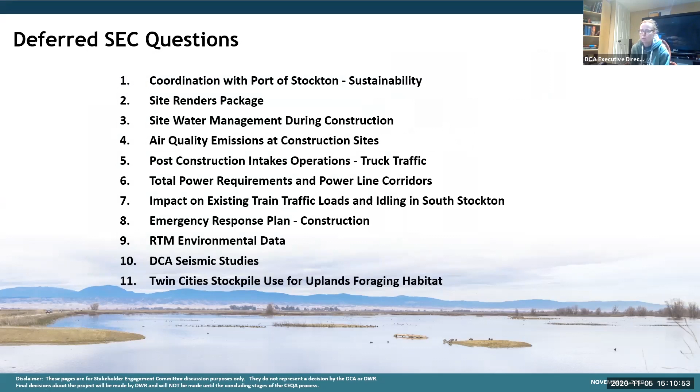Let's just keep moving. The first one was around coordination with Port of Stockton, particularly around sustainability. A request that we work together with the port, and that it's very important to help them improve their sustainability and help make them a clean port. And that any time community benefit opportunities may exist to help the port become a model of sustainable facilities, that we should consider that.

Next slide. So we did actually have a call with the port a few months ago as part of introducing them to the project, looking into opportunities of barging through the port. And in that meeting, we also brought up what they were doing around sustainability. There's 2 programs that they're running. The Delta Environmental Enhancement Program, where they largely partner with local organizations that do work in the Delta area, and that program is mostly focused on enhancing air quality, water quality, and habitats in the Delta surrounding areas. So I think that's a program where there may be opportunities to partner with them.

And then they're also a voluntary member of this Green Marine organization, and there's an environmental certification process that goes with that. The program helps industry share best practices nationally, and they grade themselves from a scale of 1 to 5 on 13 key areas of performance. Every year they release an annual report that demonstrates how they've been doing in those categories. I've read the reports the last 2 years, and there's lots of opportunity there for us to partner with them, because a lot of our goals around sustainability are very much in line with this certification program.

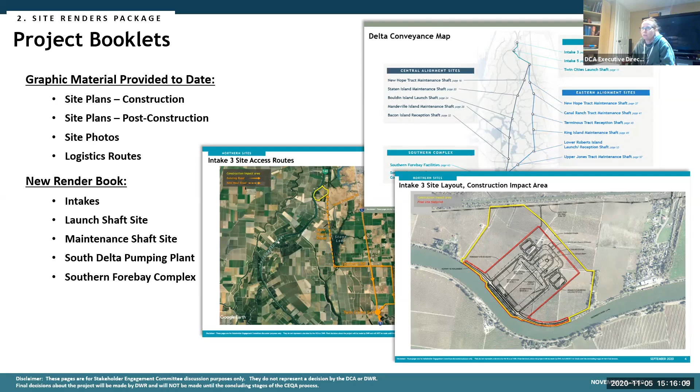So we've given you project booklets that have covered the site plans for construction and post-construction. Those are the yellow and red boundary maps that we've given you. We've included photos of the sites and logistics routes. And we've created another book for you all - a render book. We've created renders of each of the sites, or at least a typical site, so that you get an idea of what the leave behind is. We're going to show that to you next.

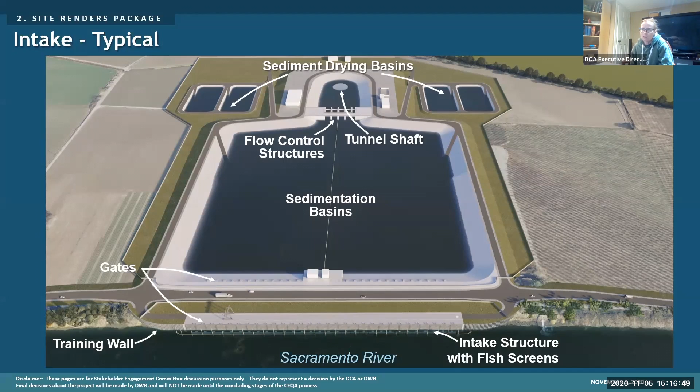So you've seen this one - this is the render of a typical intake. This happens to be the intake 5 site, but the intake design is similar at the intake 3 site. You have the Sacramento River with the intake structure and fish screens along the river, the sedimentation basins to remove the solids, the flow control structure that controls the flow going into the tunnel shaft, and that's the entry into the tunnel as the water heads south towards the southern complex. Then there's some drying beds as we remove solids from the sed basin - they need a place to dry out before they're hauled off site. So this is the intakes.

Next, this is a new render, a typical launch shaft site. This happens to be the Twin Cities launch shaft site. You'll see the dual shafts over to the left. If you recall, we're tunneling in 2 different directions there, one towards the intakes and the other south. So there's dual shafts there. And in the background there is the RTM stockpile. I show it in brown here so that you can get a better idea of the land requirements - that's about 100 acres, 20 feet high. If you recall, we talked about making that material available to various local beneficiaries of borrow material.

I think if you flip it, that turns green, Jasmine. Yeah, so we plan to put hydro seed on it. It won't be a dirt pile - it'll appear at least green when it's wet and rainy season, and it'll dry out like the rest of the grasses in the area.

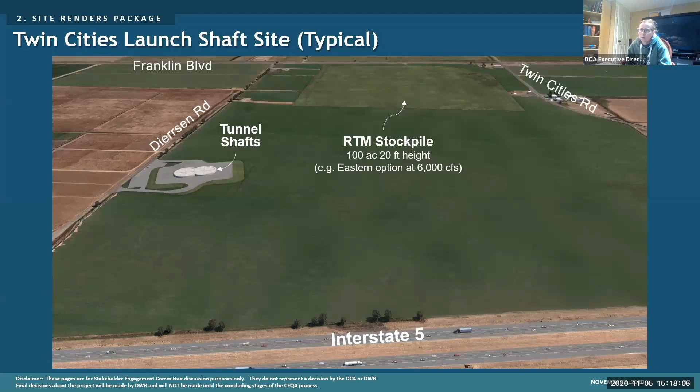But the rest of this site, as we talked about, would be returned to reclamation for agricultural use. And this would be a typical layout for the launch shaft sites.

Here's a typical reception shaft or maintenance shaft, a single shaft on the site with access roads coming off of the local roads, a maintenance and parking area, and a ramp heading up to a working platform right near the shaft. These sites are around 10 acres, typical of what the reception and maintenance shaft sites would look like at the end of construction.

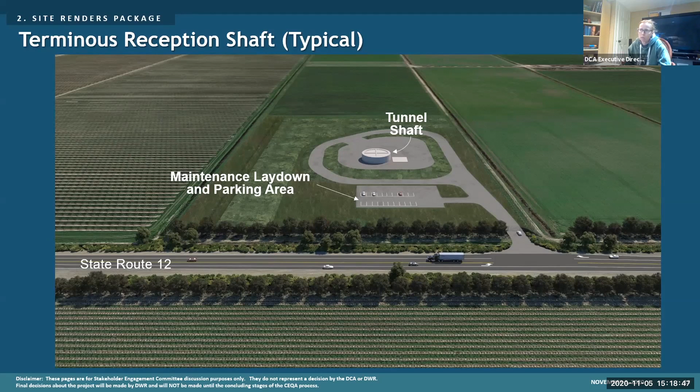And the last one, again showing the southern forebay, and there's a tunnel from the southern forebay down to the South Delta outlet and control structure, which connects the Delta conveyance water into the existing California aqueduct. Then there's the California aqueduct control structure built into the aqueduct so you can control the flow range from both of these water flow sources.

We've put these on 11 by 17 sheets, and we'll be printing and distributing those out to the committee so you have them as a communication tool for talking about what the final facilities will look like on each site. All of these you've seen before, except for the shaft site renders we've done.

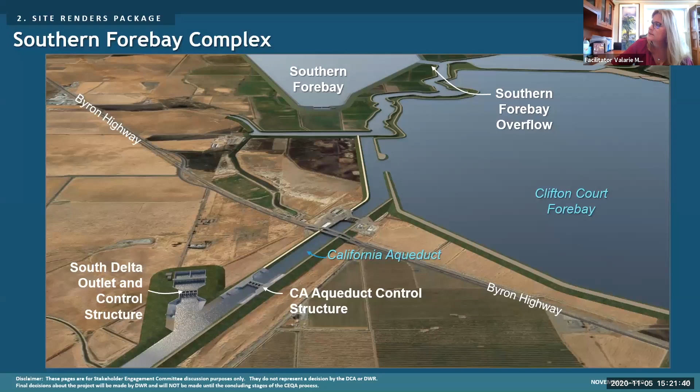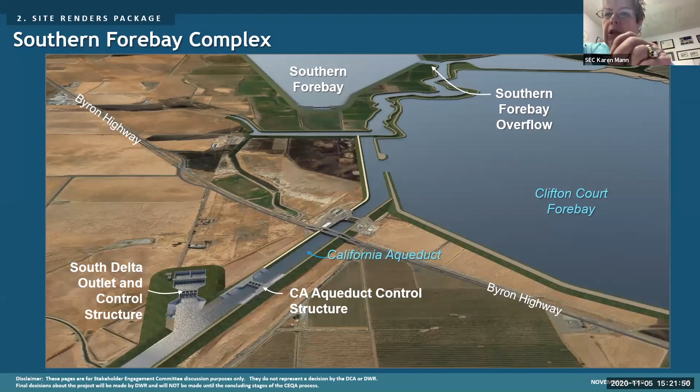Catherine, thank you very much for the explanation. Can we go back? I think it was two slides. I was wondering, yeah, right there, do you have an idea of how much distance you're looking at between Highway 4 to the north and this pumping plant? And I'm curious as to what properties are on the westerly side of the southern forebay. Do you have that information?

Hey Phil, can you unmute yourself? It's my recollection that it's about 1.5 miles from the pumping plant up to Highway 4, but that's just my recollection, you might know better. Well, to put it in perspective, from the pumping plant to the launch shaft is about 1 mile, so if you want to swing that around. So you're close, Catherine, I think it might be a little further.

Okay, about 1 mile. And to the left of that, could I find out a little more, because I know there are homes over there and I'm trying to figure out how close we are. Basically, that left side is those big WAPA and PG&E power corridors, and they're pretty wide, running all the way up along the left side. So any homes would be on the other side of those.

I think, Karen, most of the homes are a little further north than where we're at. No, there's some right in Byron. Well, yeah, those are quite a ways away. Okay, well that's all I'm looking at because that's part of my community down here. Okay, thank you very much. Welcome.

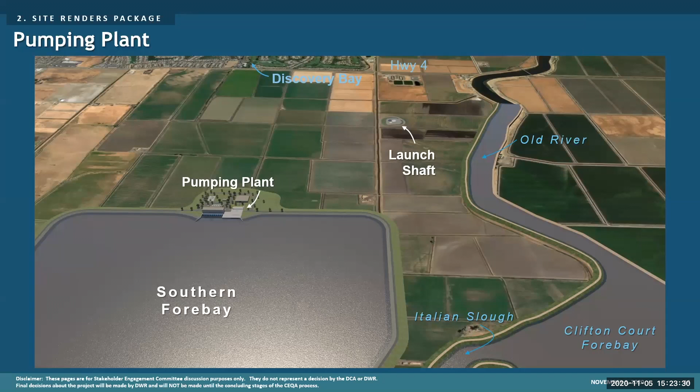Next. Did we get all the questions? Yes, we did. Oh, okay. Mel just put his hand up.

All right, Mel. Real quick, I'm assuming each of these sites will be secure sites with gates and fencing. Correct. Do you have any idea what type of fencing, how high it might be, as far as visual impact?

Gwen, I don't know if you got to that level of detail in the document, but I know we talked about 8-foot fencing around the properties. In some properties there would be more formal fencing, like around the pumping plant, with more security because people will be coming in and out all the time. The shafts post-construction will have fencing around them with gates. We also would not have any lights going toward adjacent properties, so lights wouldn't occur unless people had to do emergency work at night.

Just a follow-up comment - as a member of an agency that has facilities in the Delta, you'll have to pay particular attention to security issues, because the Delta is an interesting place at nighttime, and if you don't have a secure facility, significant damage can occur. Just a warning, and we recognize that, especially at places like the intakes and pumping plants.

And Barbara, you had a clarifying question. Just to pile on a little bit, because this now raises an issue we've never talked about - there's no sheriff on duty in the southern end of the Delta from 9 at night till 6 o'clock in the morning.

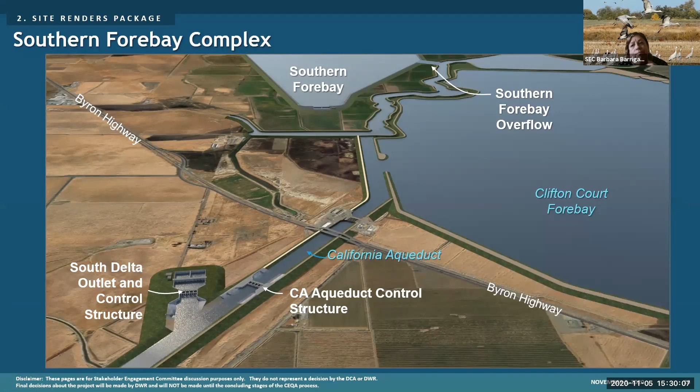So the whole security issue around equipment and even safety during the day, I think you've got a lot of work to do with the sheriff departments. Just so you know. Good luck. Thanks. All right.

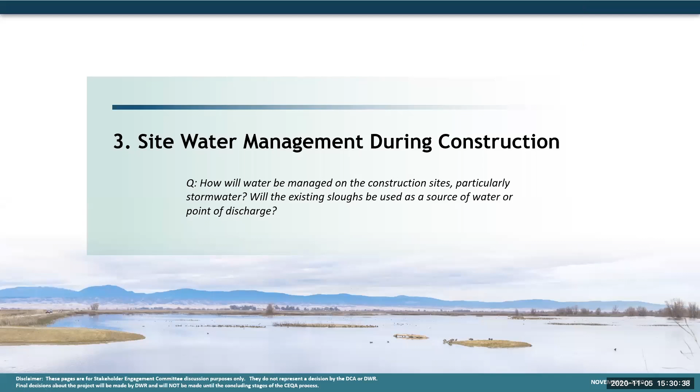One of the questions asked was how will we manage two parts of water quality: where do we find the water during construction and post-construction, and where and how do we manage the runoff and dewatering flows off of the construction site?

Our goal on all of this was to avoid reductions in surface water and groundwater supplies and water quality of the adjacent supplies. We want to maximize the use of on-site water supplies that occur due to construction, which will reduce the discharge of stormwater and minimize the need for other supplies. This means we limit surface water use to historical diversions, groundwater use to historical regional use, maximize the use of recycled wastewater if we need additional water off-site, and minimize the use of water from public water supplies.

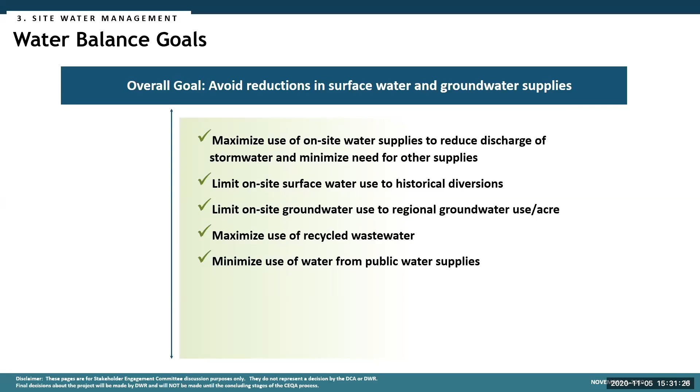Our major water demands on a construction site—we show 7 items here. Every site, though, has two biggest ones: construction site dust control at the top of the list, and tire wash basins at the bottom.

We're anticipating tire wash basins at each exit location for trucks and all other vehicles, including pickups and sedans. These tire wash basins recycle their water and filter out the soil material, but they do have makeup water going into them, and they're a large water demand on every one of our sites. If we have large sites like Southern Forebay, we'll have multiple exit locations, so we'll have tire wash basins at each one, because we're here to protect the adjacent roadways and minimize soil and dirt accumulation that would re-entrain and cause other dust problems.

Other major water demands at the launch sites especially is the water injected at the tunnel head to loosen up the soil—that occurs only at the tunnel launch site. We also need a lot of water to make concrete.

The potential water sources we would use are dewatering flows from excavations, but they only occur sporadically. We anticipate putting cutoff walls around sites like the intake site to protect the adjacent groundwater during dewatering activities, so we'll only be dewatering a certain amount of flows within shaft locations or the intake sites. But when it does come, we want to capture it, treat it, and reuse it.

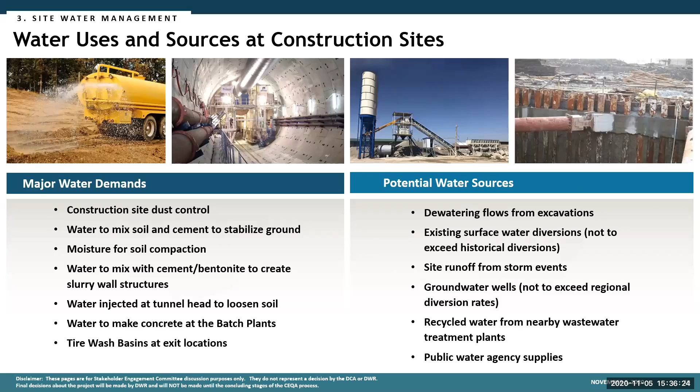Next, I wanted to give you an example and a relative feeling about how much, what the different water demands and water supplies look like.

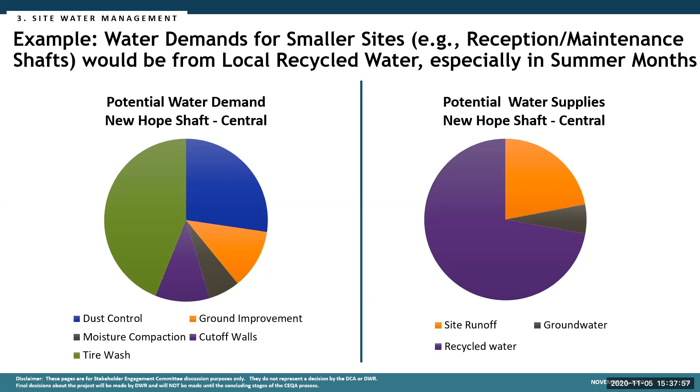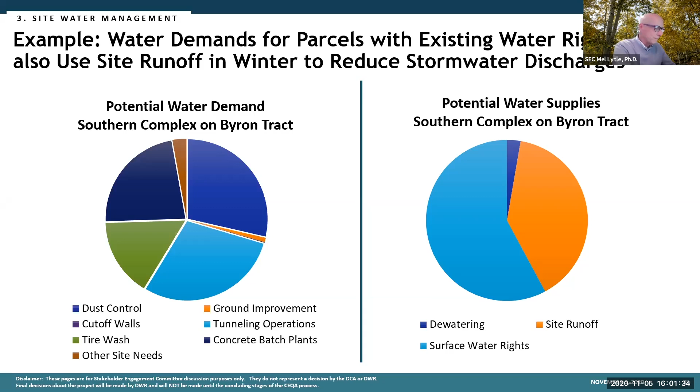Also, I mentioned the USGS publication. I have it: it's called the California GAMA Program, Groundwater Quality Data in the Northern San Joaquin Basin Study Unit, published in 2005. Thank you. Thanks, Mel. And Barbara Barrigan-Parrilla.

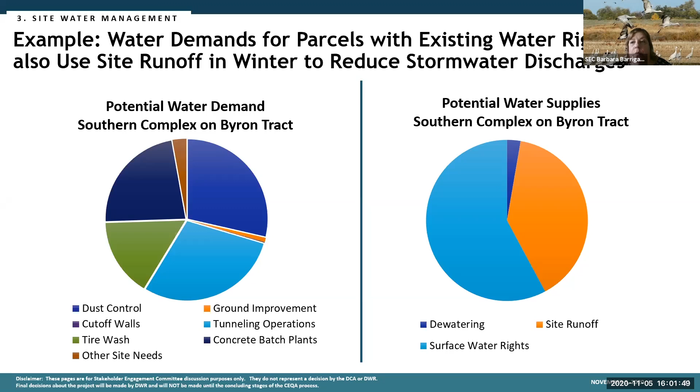Just real quick, I actually think Mike Moran covered it. Numbers when we can have them, because you don't know what you're tracking if you don't measure it. Thank you. Thanks. All right, it's 4:01.

Okay, air quality. We're asked to provide a little more information. This is a process in which we provide - next slide please - information to the environmental impact report team, and they do the analysis using the models established by the California Air Resources Board, US EPA, and others. We have pulled together and provide this information to the EIR team.

One of the things, and I know this has been talked about at other SECs, is we did a detailed analysis and schedule of all the different types of equipment that would be used at each one of the construction sites and the hours they would be used - electric equipment, non-electric equipment, and employees. We went through each type of equipment to determine and find specification sheets to confirm that if electric versions of this equipment would be used, we included that in the electric equipment.

In the non-electric equipment, or basically diesel, we also confirmed where commercially available Tier 4 diesel engines exist. We used the currently available information for two reasons. One is, on other projects I've worked on, we received comments that we were being too optimistic by saying electric equipment would definitely be available.

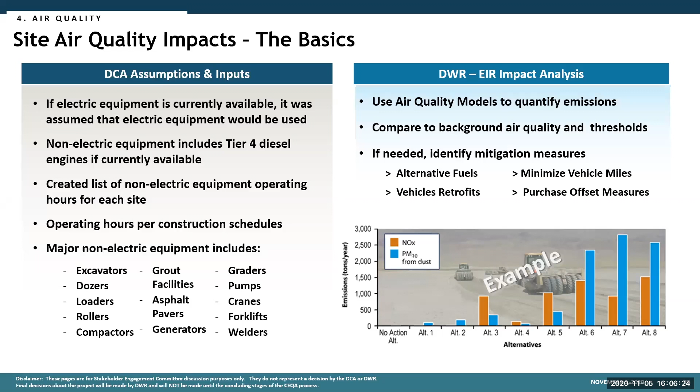For the 6,000 CFS option for Central and Eastern Corridor, this is just the total operating hours over the entire construction period at each of these sites. It really varies by month, so any one month won't look like this distribution, I guarantee you that.

But in total, it basically shows that most of the construction use, especially for non-electric earthwork equipment, is down at the Southern Complex on Byron Tract, because we're using them to form the embankments for the Southern Forebay, to move RTM around from the launch shafts, and to raise the tunnel shaft pads. There's also two batch plants down at the Southern Complex.

The next largest amount, go back one or two slides please real quickly, I'm trying to hurry. The intakes are the next largest group, because they have a lot of earthwork moving around in the highway, back and forth, and doing the sedimentation basin excavation.

And then the next are the two launch sites for each of the corridors, Twin Cities and Bouldin for Central, and Twin Cities and Lower Roberts for East. That is the completion of this. And again, this analysis will be done through the EIR, not through the DCA.

Got it. Okay, so we have a couple hands up, a couple quick clarifications on my part. Again, the project construction will follow statutory requirements, correct? Yes. Okay, and then CARB has issued directives, and the project will follow those directives as well, correct? They will be following part of the CARB regulations, and the modeling has to be done in accordance with them.

And just again, as you said, this is going to be handled in depth in the CEQA analysis in the environmental document. This right here is just a high level discussion and explanation of the modeling and not a definitive plan. You're just answering the question that was posed related to air quality during construction, correct?

Right, and it's not even the modeling. This actually becomes hours of non-electric equipment use, and it's used as an input to the models that the EIR team will be operating. And so with that, we have a couple hands up.

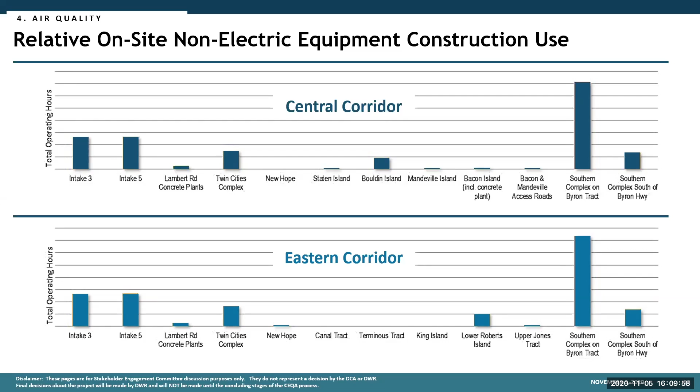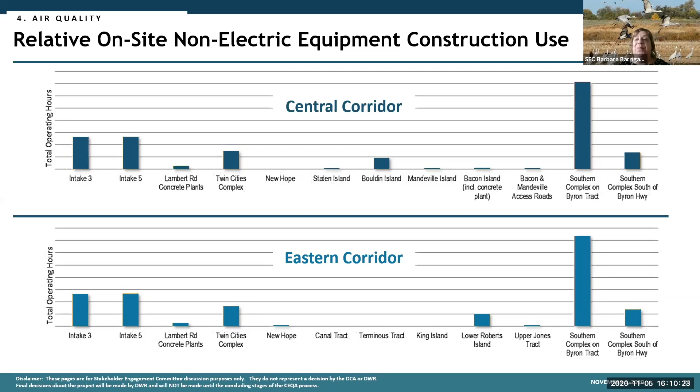And Barbara Barrigan-Parrilla asked: when it comes to offset purchases, can we advocate that purchases are made to benefit the impacted communities? We had a problem with the last EIR on water fix where offsets were going to be purchased for somewhere else in the world. So kind of an environmental justice principle.

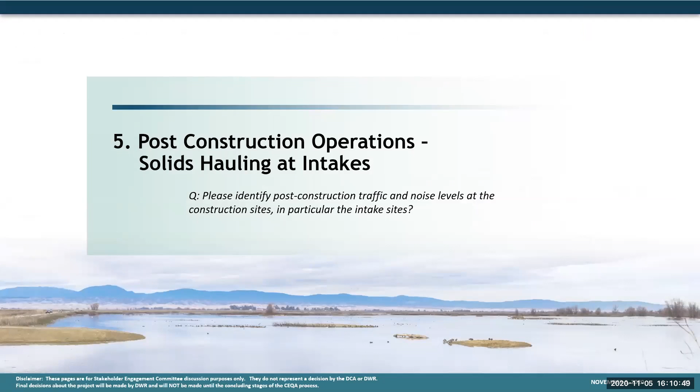Thanks, Gwen. Phil is going to pick up the next two questions dealing with the intakes and power corridors. So Phil. Okay, so the question was to identify noise and traffic levels at the construction sites, post-construction sites. Okay, so go ahead.

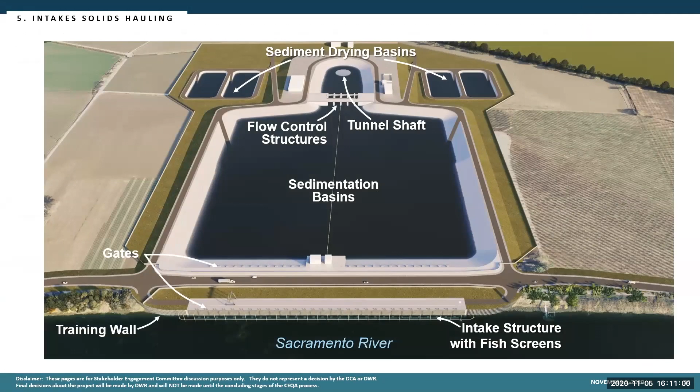The intakes themselves are gravity flow, so there's not a lot of motors or anything like that, so they just don't naturally make a lot of noise. It's the people working there that would potentially make any noise during operations. There's a certain amount of noise with some screen cleaning operations, but that's just typical crew work, nothing of consequence.

The biggest issue at the intakes is the annual removal of sediment. The sediment basins there collect the sediment, and then we dredge it out using a floating dredge and pump it into the sediment drying basins in a rotating pattern. The flow goes in as a slurry, you decant the water off, dry it out, and then scoop it out, rotating through that process.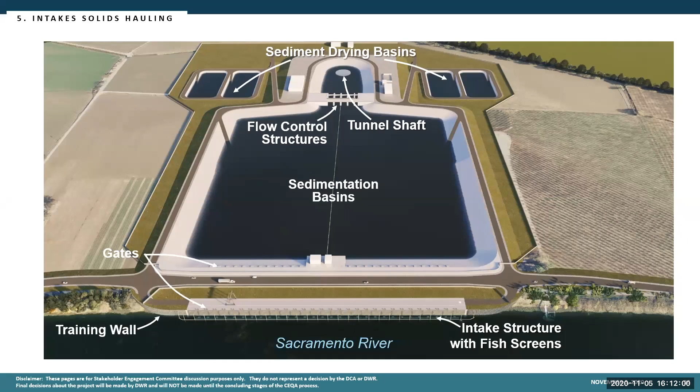So let's go to the next slide.

Each one of these basins is in a different part of the process to keep you continuously operating—scoop it out, then haul it away. The solids pumped from the basins would be dried once a year during the summer. It's essentially 2.5 to 5 months, 10 to 20 weeks a year to dry it and haul it off, and that depends on a lot of things associated with how much sediment is in the river and how much water we divert.

Obviously, if there's not a lot of sediment in the river and we don't divert a lot of water, you'd get a lot less sediment collected. But if the river was really full of sand and silt, and we diverted a lot of water, we'd get a lot more. So the upshot here is right now we don't have actual operating data to predict on a statistical basis how DWR would divert water through these things.

Okay. All right, no other questions? Nope. I think David Welch had a hand up.

I'm sorry, I can't find that wave button, but my question is - you're talking 2 to 10 trucks per hour. Yes. The conditions of our roads right now are horrible. Is there any plan for redoing the roads? Well, that traffic would be on dedicated haul roads. Yeah, and so they would come out either onto Lambert or to Hood Franklin. But again, the traffic analysis we've shown, both those are relatively low travel.

For a few trucks like this, we can do that traffic analysis, but it shouldn't be major. And then the noise level, the equipment you guys are going to be using will have backup alarms. I'm telling you, because we have a water purification plant going in here in the town of Hood, and the county has not been able to work until 8 o'clock in the morning, between 8 and 4, because that backup noise on that equipment is so loud and obnoxious that we've had a lot of complaints. So I would ask you guys to check that out as well. Getting close to town, that's all I had.

Awesome, thank you Chief Welsh.

Gia, so I just had a question about things like when you're hauling the RTM away or whatever, about things that are coming off of it, like toxins. Is there going to be an odor? These are just questions considering that a lot of it's going to be surrounding Hood on both sides.

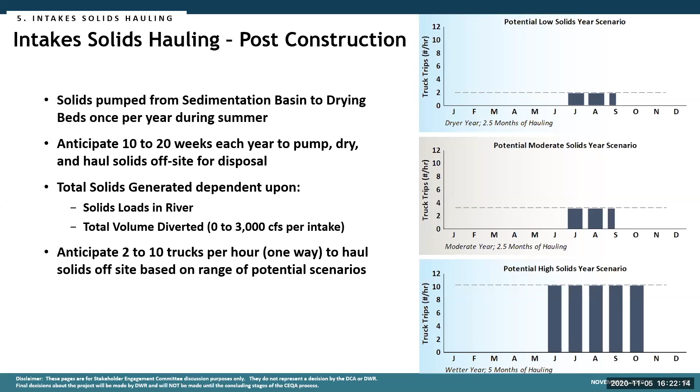Okay, thank you. All right, and I believe the project is trying to do more noise monitoring, is that correct?

Oh, hey Val, yeah, this is Carrie. So one of the things, Anna, you had mentioned something about sort of understanding local noise conditions, and we have been looking at trying to do additional noise monitoring. We do need willing hosts for the noise monitoring equipment though, so we'll probably follow up with an email to the SEC if you guys are willing to host noise monitors, or someone who is. We'd love to put more monitoring equipment out there to get a better understanding of baseline noise conditions.

Terrific, Anna, I see your hand up.

Yes, thank you. As far as the smell at Freeport, if you've ever taken a boat by that intake, there is a smell. You can smell it from the houses that are directly across from the intake. And so I think it would be a good idea to revisit that, because again, that's a much smaller intake than what is being proposed. And so the smell would probably be 10 times worse, since this intake is 10 times bigger. And I appreciate the invite for the noise monitors, and I will look for that email. Thank you, Anna, thanks for raising that.

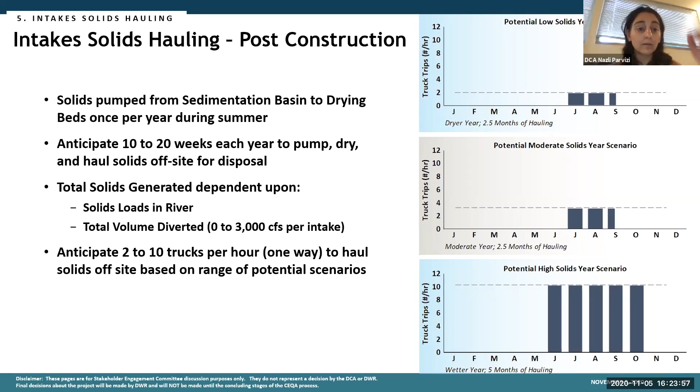Actually, Nazli, excuse me, does it make sense to send out an email after the meeting with a little more detail on the noise monitors so that the SEC perhaps could help with what Carrie raised earlier? Yeah, no, I'd be more than happy to, and appreciate it. Carrie, I'll touch base, I'll send some more information about what is entailed and what we're looking for, and what it means to have a noise monitor. And so we'll get that to Nazli to distribute to the SEC. Perfect, thanks, right on, perfect.

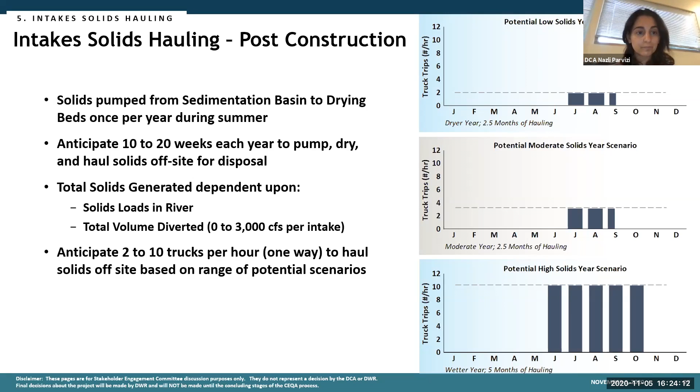All right, no other questions. Go ahead Phil. Okay, the other one, next question is about the total power requirements at the sites, and how will power be brought to these sites, and will any renewable energy be built as part of the project?

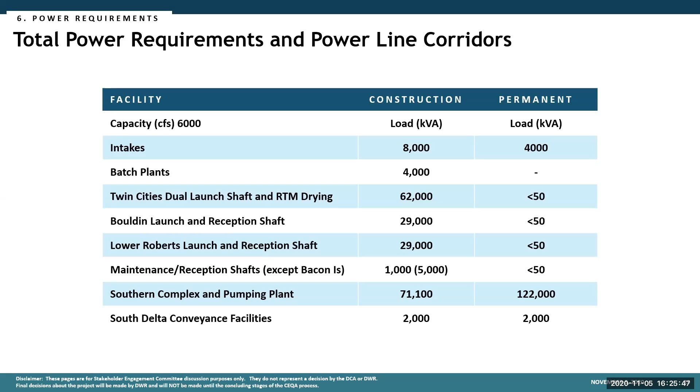So, anyway, let's move on. How are we going to get there?

And apparently, Phil, a lot of security cameras. And those unfortunately are low load as well, but yes, actually there is a fair amount of security accounted for by the state. So yep, there will definitely be security at these sites.

The concept for the intakes at the Twin Cities launch site is the main power supply would be at the Franklin substation. There's an existing power line down Franklin that we would add some arms to and run the power line down to Lambert, where we would go underground, with some switches at that location, underground to Twin Cities, and then down Lambert and up our haul roads to the intakes.

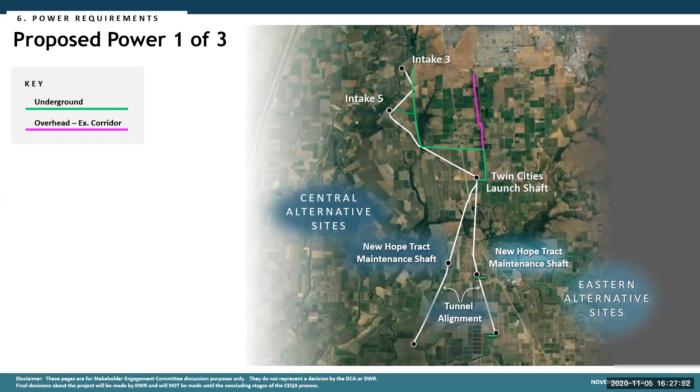So as you move down into the central portion of the line, next one please, Jasmine.

Okay, so this is the middle of the Eastern Central. Let's talk about the piece for Bouldin Island. You can see that big green line that cuts across is only for Bouldin Island, not for the eastern one. So that little square next to Terminous is all we have for the eastern route. But basically for Bouldin, it's a large launch shaft site, so a new substation would connect to the PG&E power line that parallels the freeway there, running underground in the enhancements to Highway 12 and the new haul roads down to the Bouldin Island launch site.

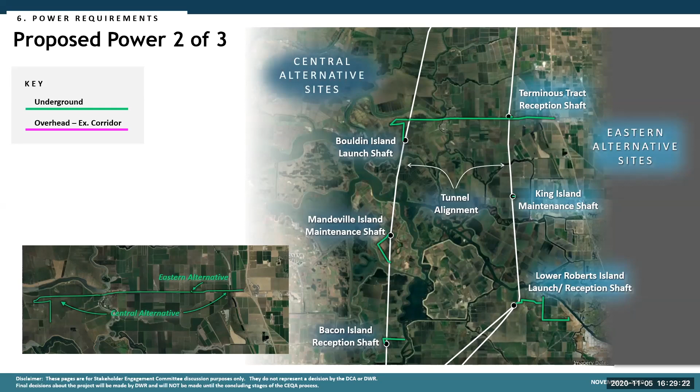Similarly, down at Lower Roberts on the lower right of the figure, you can see that again it's a connection to, I think, PG&E and WAPA down there. I'm not exactly sure who we're connecting to, but assumedly you connect to PG&E there with a substation, and then underground in our access roads to our RTM management site and over to the launch site. All of the shafts include small underground lines in access roads to access the shaft sites, and those all have lower power demands. Okay, next one please.

When you get down to the southern end, one of the things of note here is the underground stuff obviously has no effects on things like sandhill cranes. But down in the far south, there aren't as many protected bird species, so there's more overhead lines down here. Plus, these are bigger lines that have to come in, 115 kV lines that have to feed the southern forebay, and we needed dual feed for dependability of the project.

So what you see coming in from the upper left, coming down at an angle in orange, is a new pole line, 115 kV, coming from PG&E's Brentwood substation and angling its way down into the substation on site. The green lines on site are for routing to our various loads on site underground. Then on the right side, coming up at the bottom, is the WAPA Tracy substation.

So again, that would be a new 115 kV line coming up to the southern forebay. These are above ground lines, big lattice towers. Where it's purple, it's directly parallel along another one. Where it's orange, it's either a new one or parallel to an existing power line, but not as big, so we didn't think it was fair to call it parallel to the corridor, since these will be the larger lattice towers. Then there's the drop at the very bottom to the South Delta outlet and control structure, which is a simple overhead drop from a power line that essentially already exists there.

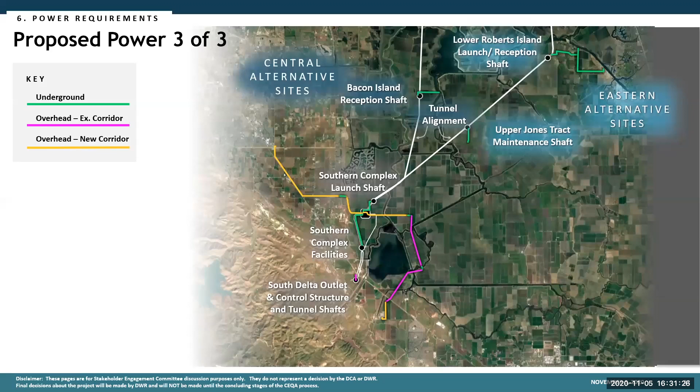Yeah, I think that's the end of power. So is there any questions on power? No hands are up.

Okay, we switch to Neil now, assuming he's— I'm sorry, can Mike Moran just jump in with a question on power? Oh, hey Mike, sorry about that.

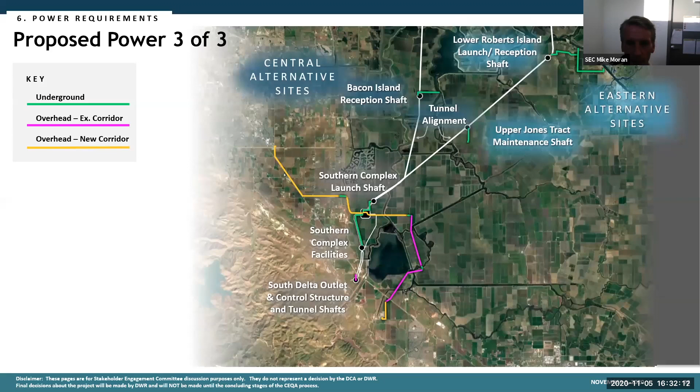Hey, just regarding that, especially that southern area, give a lot of early consideration to migratory bird species, tricolor blackbirds, and also raptor use up in there. The Altamont wind resource area has a lot of studies on flatland use by those birds. I'm not sure what scale we're talking about with some of these power towers, but just keep that in consideration, please.

Thanks, Mike. All right, so we have Neil Painter, who leads the logistics group, and he's going to hit two of the questions dealing with train traffic, loads, and emergency response. I'll also note it's 4:32, Neil. Yeah, I'm intending to be fairly brief in the interest of time. Thank you, Catherine and Valerie.

So question 7 relates to air quality issues associated with train idling that's been reported in South Stockton. The question was focused on what the DCA's contribution would be to that. Next slide, please.

Okay, the simple matter is that we do not have access to train idling data in South Stockton, because it's a commercial facility. What we do know is that BNSF Stockton operates around 20 freight services per day, and there are also around 8 Amtrak trains per day that go through that facility.

The DCA would be contributing around 2 deliveries per week to the Lower Roberts Island site. These trains would carry things like precast concrete tunnel liners and bulk materials for making concrete on site. In addition, there would be around 2 trains per day going to the Southern Complex site, again carrying liners, but this time also carrying RTM material along with bulk materials.

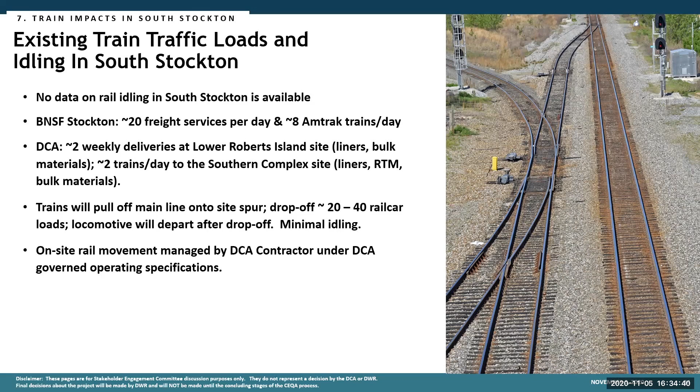That's it for that particular presentation. So any questions on train idling? No hands up. Go ahead, perfect. I'm going to barrel on in that case.

So next, this is in relation to the emergency response plan. There was interest from the SEC about how emergency services will be provided during construction. Obviously we're talking about a major construction activity planned for the Delta over several years, and we're very mindful that the existing emergency services capability is geared towards the current communities, so we need to take into account what our impact would be.

So that's what I just mentioned relates to that top box there—coordinating a response with existing agencies so we're providing for the safety of those working on the construction project and during operations, without compromising coverage for the community. There are really two parts to this: we've developed a draft emergency response plan, and we recognize we need to satisfy CalOSHA and federal tunnelling requirements.

We also need to allow for the general civil construction requirements for construction activities in the state of California. And during the operations phase, the completed facilities will have to conform with DWR's amended emergency action plan requirements.

So what's the project aiming to do to actually work with the situation? What we've done is go through an outreach process to gauge capabilities, and Chief Welch was one of the fire chiefs contacted. We went out to the community and emergency response agencies to gauge what the local capabilities currently are. We then started looking at opportunities to enhance emergency response, which can be done through several means.

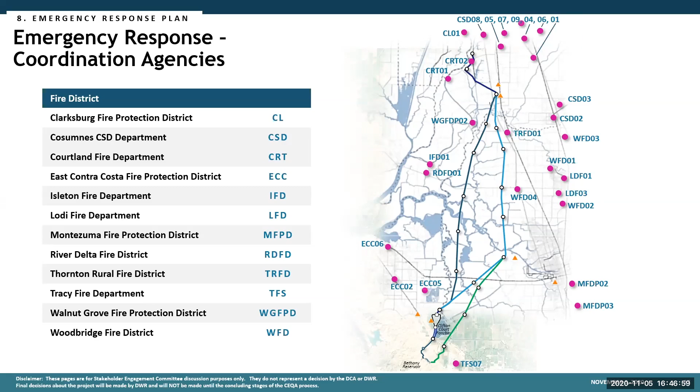Also, I'm seeing this as part of the issue, emergency response to the location. What about transport to and from local hospitals, things of that nature based on emergency issues? Sure, good question. So in addition to fire departments and EMS, which is probably the most critical need, we've also looked at proximity of law enforcement and medical facilities. With medical facilities, we've identified those that have trauma units, and those that have, for example, ability to receive helicopter casualties. Okay. All right, thanks, Mel.

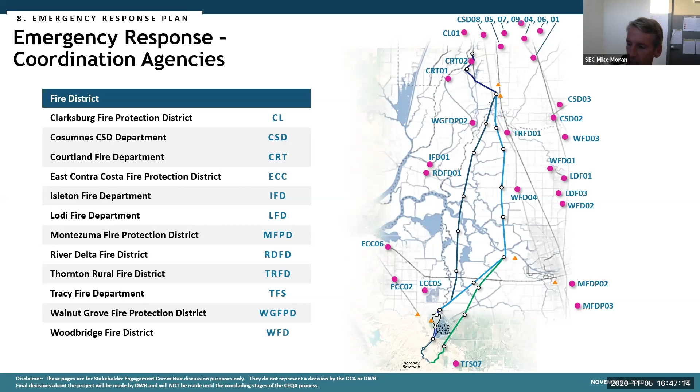And Mike Moran: This is great, Neil, thanks so much. On the previous slide, it says the project would aim to augment or expand existing local emergency response agency facilities. So we're talking about facilities and a legacy of equipment and training. Staffing? It seems there are fire stations that aren't staffed that are in existence right now, and that seems to be the biggest hurdle as far as public safety goes, fire safety out there. Is there any discussion on staffing or cooperative use between staffs for emergencies or anything like that?

That falls into the broad category of consultation that would need to be undertaken going forward. We are aware that some fire stations, particularly in South Delta, have been closed, but the fire departments have maintained ownership and the facility is sitting there ready for use. We'd need to look at travel distance to the nearest construction site - if it's within a reasonable distance to satisfy regulations, we could look at recommissioning those facilities in cooperation with the fire department, providing resources and training to support our project. When not in use for the project, they could potentially support the community.

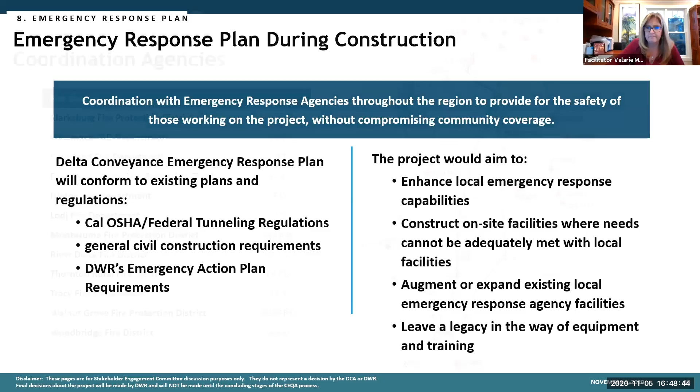Okay, thank you, awesome, all right, we're forging ahead. Catherine, all right, next one. We got Graham wrapping it up - three topics here: soils, environmental data, some seismic, and we'll end with the last question from Sean regarding potential use of the Twin Cities site. So Graham, you want to pick it up? Yep, all right Graham, it's 4:49.

Got it. So this first set of slides talks about environmental data we'll be collecting as part of the project, focusing on year one, specifically to address the question about different types of potential background occurring minerals or contaminants and how the RTM may compare to those levels.

Just to reiterate, this is the year one testing program, because that's what we've actually got scoped out right now - there will be years following, but here we're focusing on year one. We have three different targets for the sampling. There's background surface conditions - very shallow, 0 to 3 foot sampling. Next is areas with shallow excavation, for instance at the intakes and the southern complex, where surface excavation will occur and soils will be reused on the project. Lastly, collecting samples down at tunnel depth, representative of the material that would largely constitute the RTM, down at the 115 to 160 range.

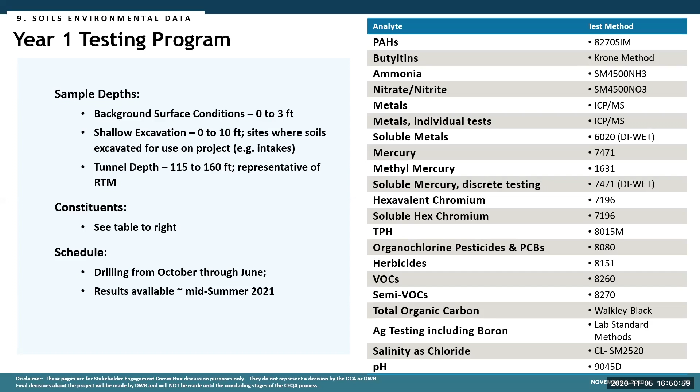In terms of constituents that'll be tested, they're listed on the right side of the slide in the table. There's aromatic hydrocarbons, all sorts of metals, soluble metals, methyl mercury, mercury, soluble mercury, hexavalent chromium, soluble hexavalent chromium, and a whole host of organic compounds and hydrocarbons. All of these will be tested for with the samples described on the left side. The schedule is to conduct this investigation from October this year through June, with results available mid-summer 2021.

This shows where those samples will be collected, grouped on the left with background 0 to 3 feet, shallow 0 to 10, and then tunnel depth. On the right you can see the locations of the actual sample collection points as purple dots and how they compare to the various alternatives or options of the project. Background sampling would be on Glanville Tract, Staten Island, Bouldin, and Lower Roberts. The shallow 0 to 10 foot near-surface sampling would be conducted at the intakes and at the southern complex on Byron Tract. Deeper borings for tunnel depth samples would be at the intakes, Glanville Tract, Staten Island, Lower Roberts, and Byron Tract at the southern complex. That's it for the environmental testing.

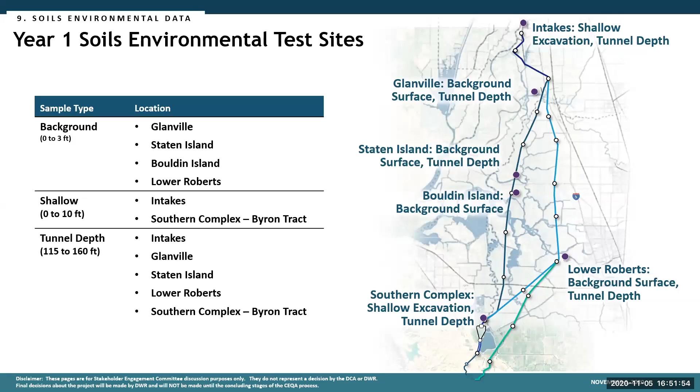I'll pause and see if there's any questions on that information. Any clarifications? Okay, keep going, keep going.

Next is to address the work being done by the DCA related to earthquake analyses or seismic studies. The DCA is performing, or will be performing, seismic studies. This goes beyond the coming year, although some is included in the current year - this is not year one work, it includes year one and well beyond. There will be a variety of field and laboratory tests performed to assess seismic risks at each site, to ensure that features being designed or modified for the project meet all seismic standards for building codes, regulations, and factors of safety for stability and performance. This focuses on the project facilities and anything we touch, including existing levees that would be affected by the project.

So in terms of the studies and testing, there's a series of seismic cone penetration tests that are planned. Those will be performed in the year one testing program. There's also downhole suspension logging, which is another way to accomplish some of the same type of testing as the seismic cones, looking at shear wave velocities in the subsurface.

There will be a series of studies related to the West Tracy Fault, including test pits and excavations, boreholes, laboratory testing, and a host of other studies. There's also cyclic shear strength testing planned, trying to mimic the conditions that occur during liquefaction, when pore pressures increase in the subsurface and strength loss is more common. This laboratory testing will evaluate the strength of those soils under that condition.

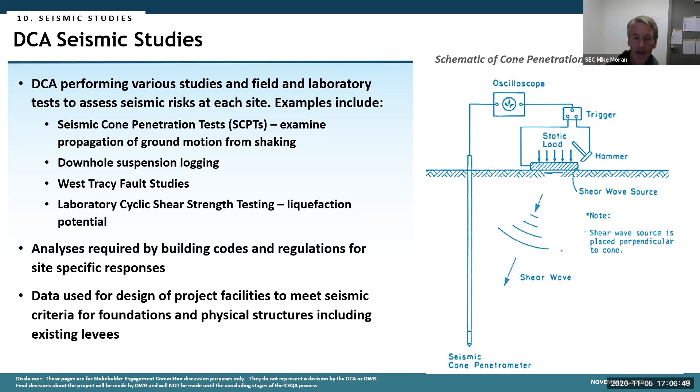Thanks, okay, awesome. All right, Graham, go ahead.

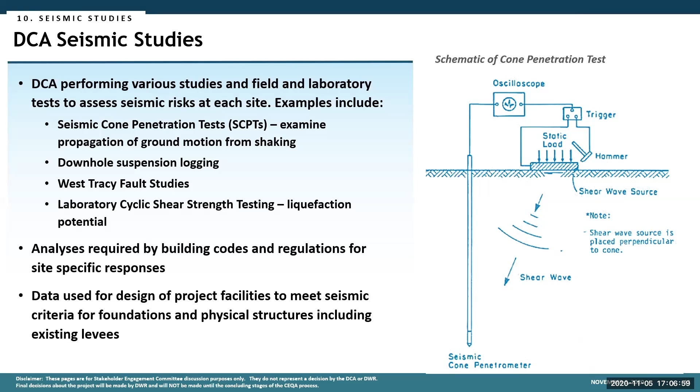So Anna Swenson, you have your hand up. Yeah, so this is an area of special interest to me. So the first thing I want to point out is that you don't have a willing seller.

The person that already owns this property already does foraging. There's a plan already in place to create potential crane habitat and forage that would be well established and well in place before this project even breaks ground. And so I think you guys are going to have to consider a different site. I don't think that this site is going to be what you think it's going to be.

And it really bothers me to see someone's property laid out as a potential when you haven't had a discussion with them. This is supposed to be a project where we're trying to work together and make this beneficial for all. And this type of a graphic takes you guys back. You lose credibility because you're literally taking someone's land that they've owned for multiple generations and making plans without even having a discussion with them.

I want to urge you again, I've said it before and I'll say it again, I really want to urge you to not make assumptions. You're coming in attempting to do this project, and what you need to try to find, if you possibly can, would be willing participants. But I don't think you're going to get any willing participants if you continue to make these great assumptions.

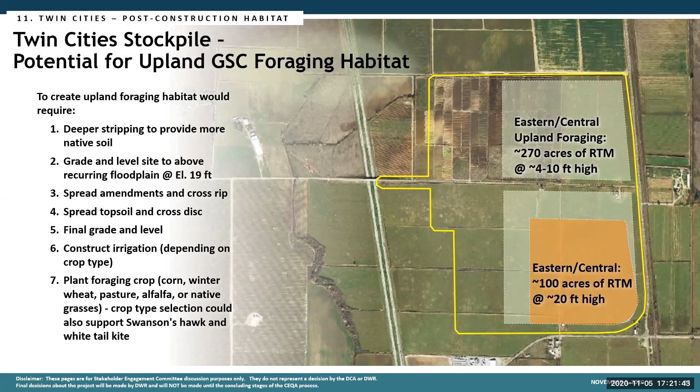I think all I can say is noted. I understand. All right, I understand. Sounds good. It is 5:21.

Let's move on to Catherine - you want to introduce the next item? We just have a brief introduction, a progress update on where we are with Bethany Reservoir. Phil is going to lead that conversation.

Continuing the development of Bethany for all you folks, we have a couple of update topics today: the basic logistics plans of how to access the 4 main work sites you see in the photo, and a quick review of how the pipelines will be installed. We'll go through the pipeline today - not a lot to see since they turn out to be buried - and go through quickly how they get constructed, and maybe entertain some questions on that.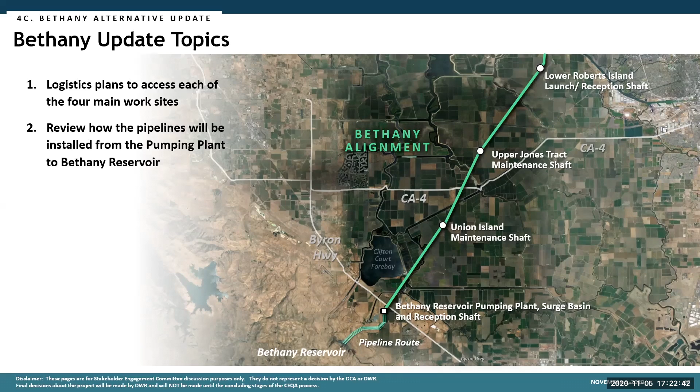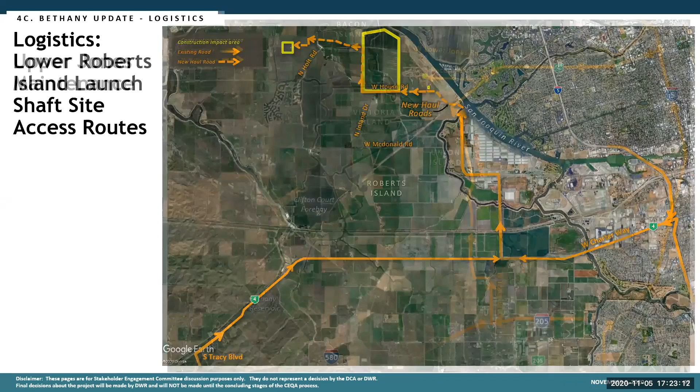I'm going to go pretty quick on these. Basically it's the 4 sites. Access to this is the Lower Roberts launch shaft, so access is through the port off Highway 4. You could come from either direction from I-5 on Highway 4, or there's a concept of coming up South Tracy Boulevard to Highway 4 as another alternative - I'll show you how that gets developed on the next slide, since it covers that as well.

Here's the first maintenance shaft, south of the Lower Roberts launch site. Again, you can see how South Tracy Boulevard gives you an alternative path coming up off the 205, 580 area versus the I-5 path. It still avoids the bridges on Victoria Island, so it's less of a snarl onto Highway 4. These are not the major traffic sites, so that's access out onto South Bacon Island Road.

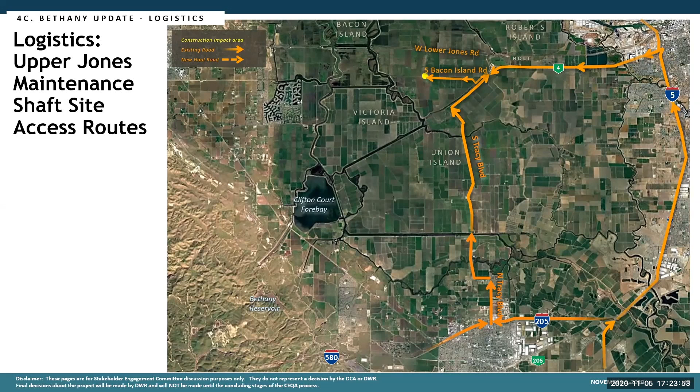The next one is very similar for the Union Island maintenance shaft. Again, you'd use South Tracy Boulevard, either off the 205 or Highway 4, go down Clifton Court Road and up Bonetti Road right to the site.

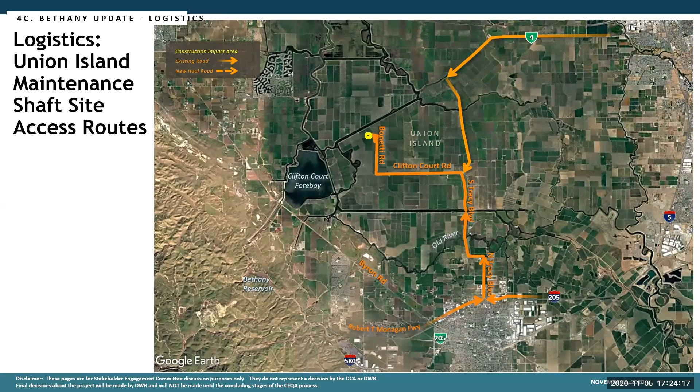What we're calling the Bethany complex area is obviously a lot more complicated.

As you know from past meetings, the Byron Highway is not great. It's a crowded road. There is some planned development on the Byron Highway that might make it a little less of an impact up to Mountain House, and we potentially extend that up to our interchange. But the primary access is really coming off the 205 and 580, basically through some of the lesser used county roads, West Grant Line to Mountain House Road.

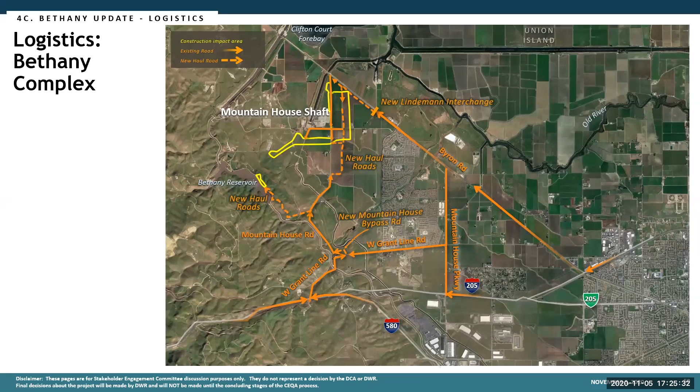There's a small hamlet there at the intersection of West Grant Line Road and Mountain House Road that we would build an interchange with, basically a traffic circle away from them so the traffic doesn't go through their little hamlet, and then approach the site from the south there. There's obviously some roads around to get to and around the site, and also up to the Bethany Reservoir end on a new haul road that goes up around the conservation easement in that area.

Now moving ahead to the pipeline route. You can see the pipelines come out of the pumping plant at the pumping plant and surge basin. They route up to the reservoir with two short tunnel sections along the way. So let's talk about this pipeline construction.

Basically, the aqueduct for a 6,000 CFS project is 4 parallel 15-foot diameter pipes. Now there's 6 shown - the 2 on the outside are just showing where we would stockpile pipe while we were building it. So we would lay it out there and then set it in the trench. The overall trench for the 4 pipes is that darker gray area - that's about 140 to 160 feet wide and about 12 to 15 feet deep.

So you can see it's not completely buried, and then we're going to mound over the top, and that will minimize hauling of material so that we can kind of dig out what's in the bottom and help use it to make that backfill around the pipes and use the material from the site to bury over the top. This is almost identical to what the Central Valley Project did on the Jones Aqueduct that we actually crossed on the way up there. So we're going to backfill the trench with basically soil cement - we're going to take the excavated material, mix it with a little bit of cement and water, and use that.

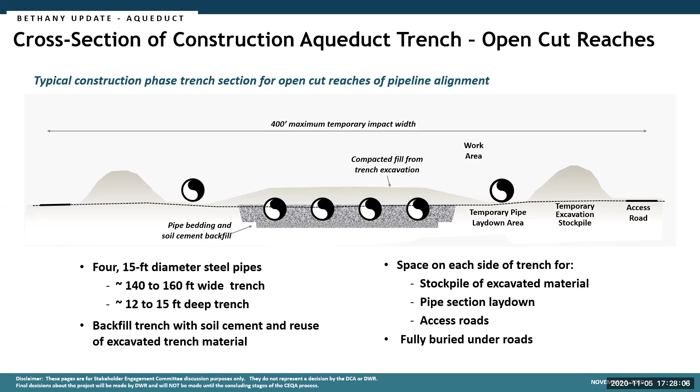So again, we put the pipe into the tunnel, and then the space between the tunnel and the pipe would be filled with grout. And basically we have a steel pipeline tunnel when we're finished.

So that was just kind of a quick summary of how that aqueduct would get built. So any questions, I'd be happy to entertain.

So we have set this up because it gets pretty technical on our surge control issues. We wanted to go underneath. So we have to tunnel them because they need to be in service, plus those are really large pipes as well. So that's a crossing of two major facilities.

Now the one up at the end, that's a tunnel because that is a conservation easement. I think we showed you back earlier in some of the siting for Bethany. Yes, conservation easements were a limiting factor of how we got up there. So we're tunneling underneath the conservation easement. And because of the grades and such, the tunnel ended up a little longer than the width of the conservation easement in order to accommodate the ability to tunnel underneath it.

So the substrate is not a big driver. This is not really hard rock. We could have easily built it otherwise, and I'm sure we will encounter some of the rock along the pipeline route.

Okay, thanks. And then just following up really quickly on what David said, the purpose of the forebay is not really storage during high flow events or anything. It was just to set up the water to be pumped through the Banks plant.

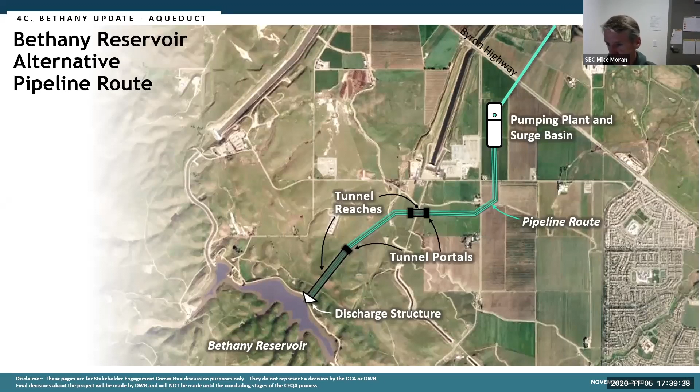It seems to me, and this is just a comment, you've got these two parallel systems with pumping plants next to each other. I would think for operational flexibility, if something happened at one and you wanted to use the other, right now they're just so isolated. I would think you'd want to tie them together for flexibility down there. Is that thought about at all?

That is kind of what we're doing. We're tying the two systems together using the Bethany Reservoir because this system goes for hundreds of miles to the south. The existing pumping plant could not be used with the Bethany plant. Like on the central and east options before Bethany, we had to pump it up at the southern forebay to match the hydraulic grade line at the Banks pumping plant. So we wouldn't be able to use the Banks pumping plant with Bethany, even if they were connected, because the water levels would be so much different.

Well, but if you did have a forebay there, then you'd have complete flexibility to work either way. But remember that because of friction loss from the river, by the time the water gets to the southern forebay, it's 50 feet underground. It has to be lifted up into the forebay. So that would be a whole other pump station.

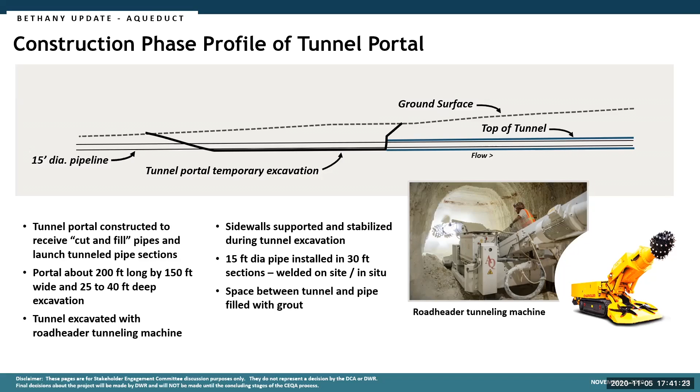Moving on. Barbara Keegan: Yes, at this point we'd like to ask DWR's Environmental Program Manager, Carrie Buckman, to provide us with an update on the CEQA process.

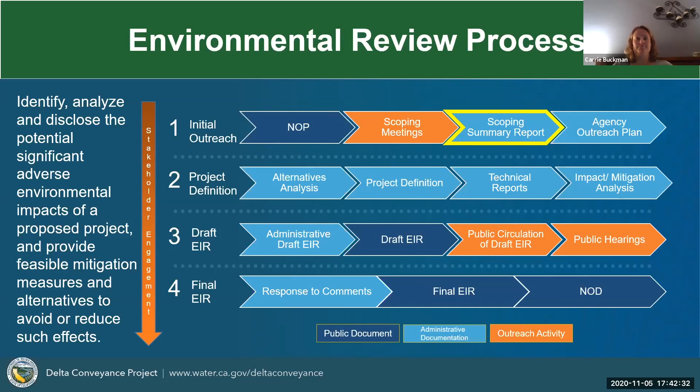So, next slide, we'll go fast given the time. This has some updates on where we are on each of the different processes. For CEQA, we're working on existing conditions, documenting the conditions currently in place. We're also identifying analytical methods for a lot of the different resource areas, refining some models so they can be used as part of our effort, and getting ready to start impact analysis.

For NEPA, the Corps closed their scoping period on October 20th. They received about 90 comment letters or emails, and they're working to process those comments.

For the soil investigation, field work has started under the Soil Investigation Initial Study Mitigated Negative Declaration. Graham showed that work plan earlier, so some of those investigations have begun and will proceed for the next year.

The Community Benefits Program, I just wanted to highlight, we talked about this a bit last month, but we are preparing for a discussion of the Community Benefits Program starting in December. We'd like to start in December and dive in the new year, working on a framework for that program.

And then the Environmental Justice Community Survey is open. We talked about that last month, and that's open until the end of November. So I think those are my updates for the month, if anyone has any questions.

I see no hands. Okay. All right, at this point then—oh, thank you very much. Sorry, Karen, okay, Karen slid in. Okay Karen, there he goes. Karen, man. Karen, your mic, you're still muted, my friend. Let's try that now. There you go. Crap, I'm sorry, I apologize for screaming in here.

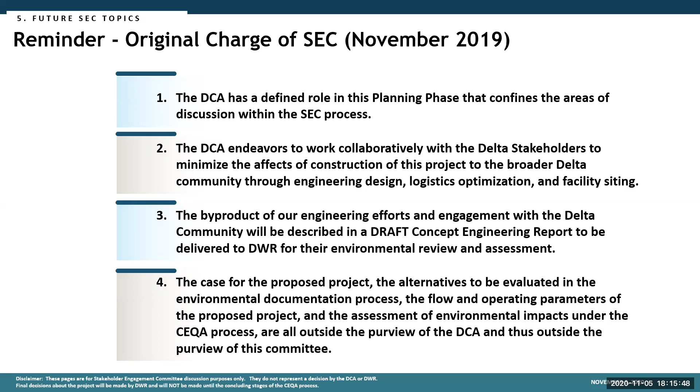When we originally formed the committee, we had just one alternative that had been identified and given to the DCA - the Central and East Corridor design. We experienced delays with the issuing of the NOP, and the DCA had significant changes that happened as a result of this discussion, moving facilities and rethinking through some of the design. So we had thought we would finish mid-year, but we actually finished closer to the end of this year, Q4, and I presented that in a slide at the last meeting.

So where we are now is we've pretty much wrapped up the Central and East Corridor, and we're actively focused on the Bethany alternative. We plan to wrap that up at the end of the first quarter of next year, so obviously we want to continue working in this fashion with the group to get through the Bethany design. Next slide.

So we have a proposal here that continues the SEC process through the end of 2021.

In this proposal, we would continue to update on the Bethany alternative until that had finished. There's been a strong interest from this group to participate in providing feedback on a community benefits program, and one of the things that needs to be done next year is to come up with a framework for that program. So we would use this committee as one forum of many to solicit that feedback.